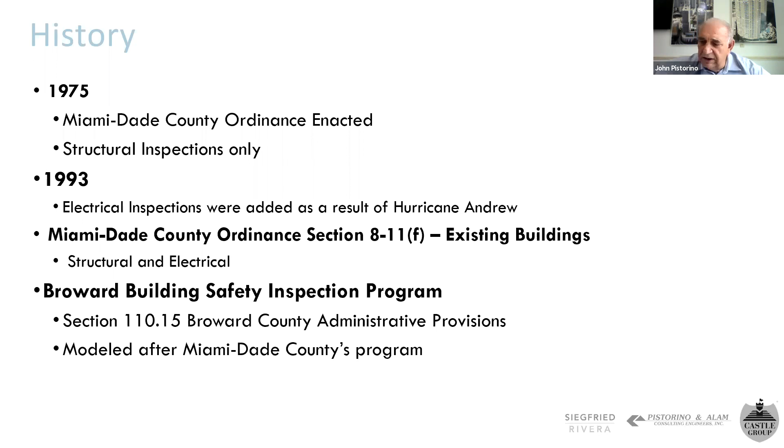The purpose of determining the scope of it has to do with the general structural condition. Engineers who have the ability and understanding of how buildings are designed and constructed can then go ahead and do the inspections in a reasonably safe manner, assuming the buildings have been taken care of.

The 40 years was established because of the issuance of buildings that were around that period of time. The idea was that any new buildings built after 1975, the building owners would still properly maintain them as required. The 40-year recertification was to give the building official a chance to have something on record that it had been complied with all that time.

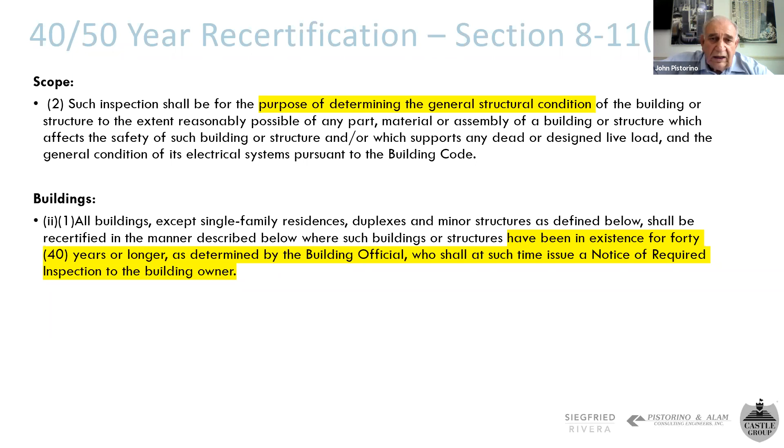As the next slide will show, this is how the report is written. You have to have a person licensed in the state of Florida, a structural engineer or architect who is also licensed and understands buildings. It does include electrical too.

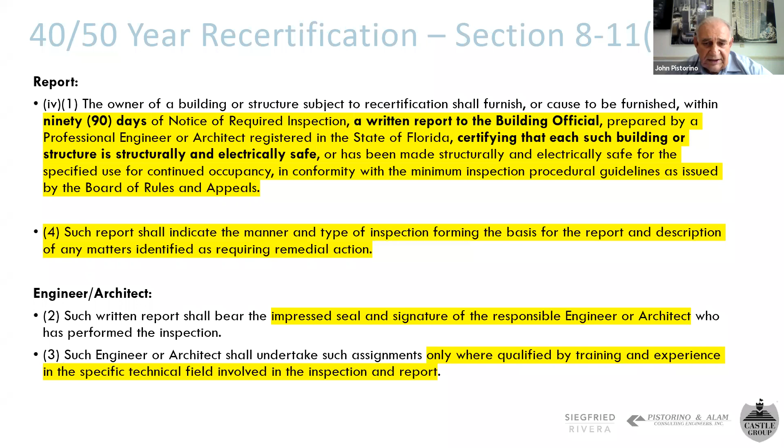So what happens is the building official does receive a report signed and sealed by the architect or engineer stating that the building's condition is as it's intended to be.

The next slide shows what happens if a building is found to be okay and not requiring any work - then the architect or engineer will provide a signed and sealed certificate statement.

If work is required, the building official can give time to do additional repair work, as long as there's nothing impending that would be problematic, with no potential for personal injury or collapse. The building official will be advised throughout the process of doing the necessary repairs.

We know that condominium associations or owners may be going out for bid, which will take some time. If necessary, temporary shoring would be put in place, or whatever is necessary to make sure the building is still safe for occupancy.

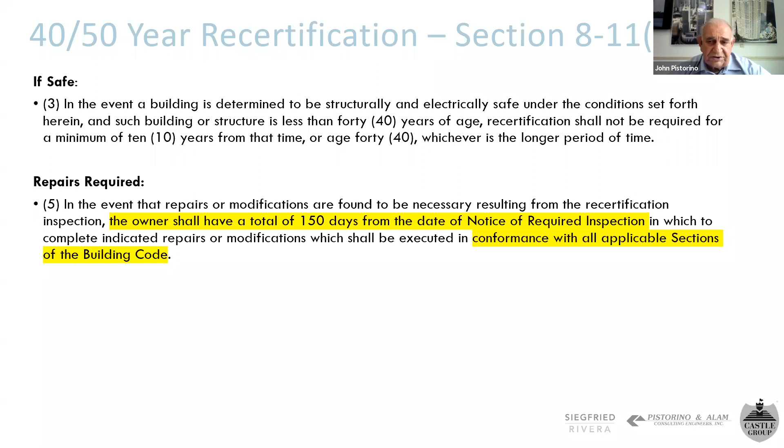The next slide shows an official statement by BORA, the Dade County Board of Rules and Appeals, which oversaw the South Florida Building Code. This is their publication that shows the extent that it is a visual examination.

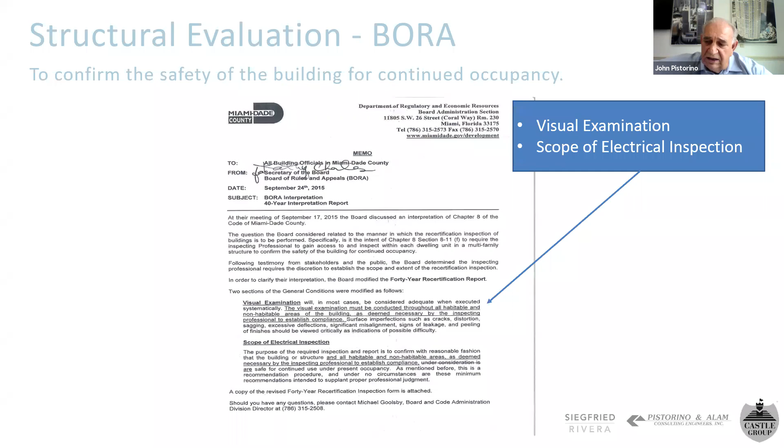On the next slide, you'll also see that included in the inspection concept is the need to realize the effects of time and degradation of the materials the building was originally built with, and to see if any issues have to do with weathering or something that would degrade the materials, which would be taken into account.

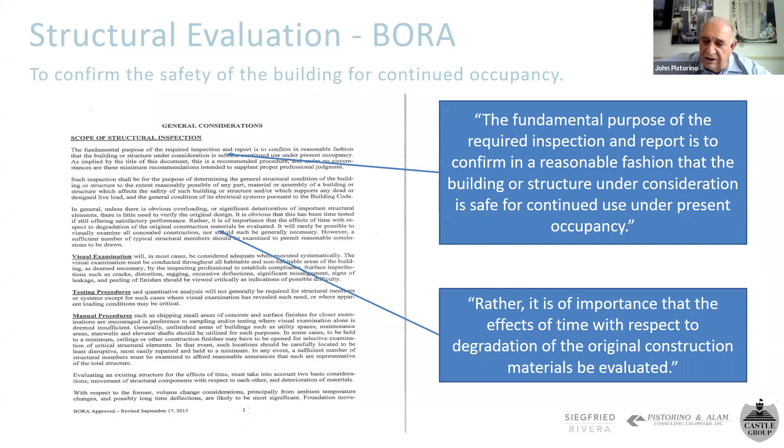So then we go to the next slide - this is where the building official will give a notice to the owners of the building that your 40-year recertification is coming up and you need to comply with it.

We emphasize we don't want to wait for 40 years before we start doing building repairs. What we want is to look after the building from the day it's actually built and first occupied, keeping up with maintenance as intended at the time it was built, so that when you do get a notice like this, it should be fairly easy for a structural engineer to go through the building and see it has been maintained or repaired, so the notice is something that can be easily handled.

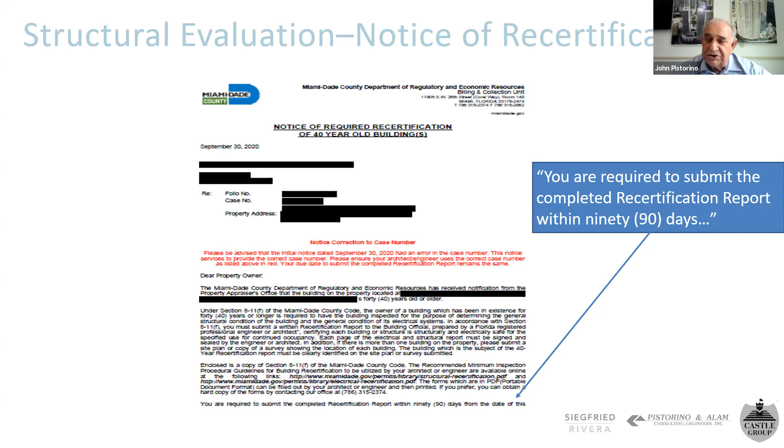So the next slide shows - and I have a comment on this one too, John - all right, this is just a

model notice that a client would receive, and it's really important that as soon as this notice is received by the association, they pay extreme attention to it. You want to be prepared well in advance, but be cognizant that this notice is forthcoming. Also keep in mind that notices get lost in the mail all the time - there are situations where notices have been sent out, the client hasn't received them, and all of a sudden they're behind.

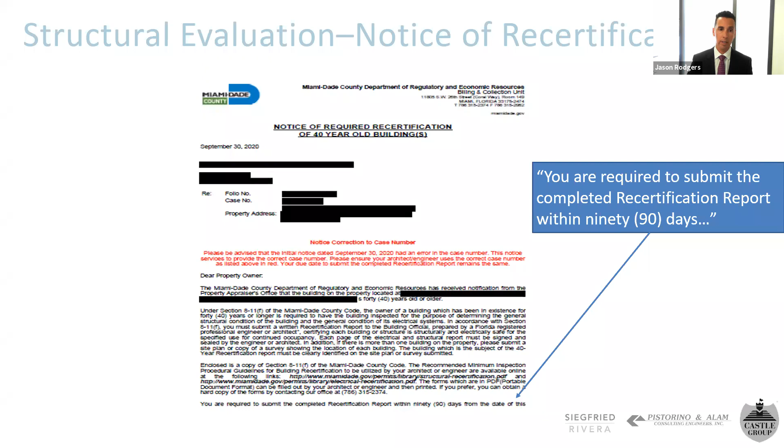This is what happens when you don't comply with the notice. Miami-Dade County will send out a 40-year-old building recertification notice of referral to the unsafe unit.

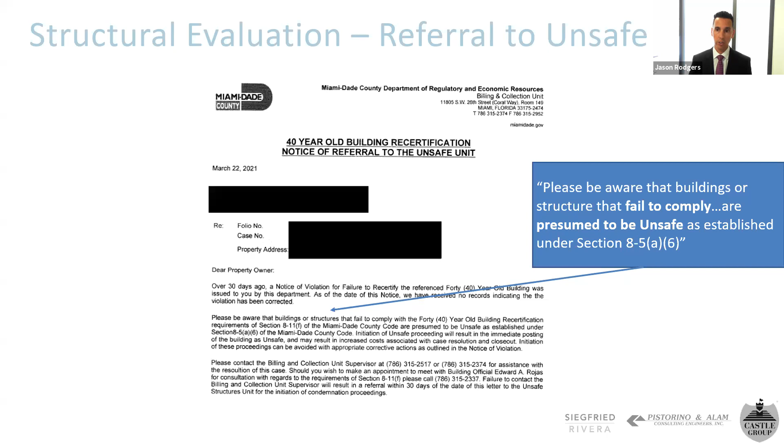If they haven't complied with the recertification program, the county sends out this notice. The building official can then issue a violation, and if it's not complied with within a period of time, the building official has the authority to withdraw the certificate of occupancy and ask the building to be vacated if there's an impending life safety issue. At that point, the building official is engaged, and the association or building owners should actively advise how long it will take to complete the work if found non-compliant.

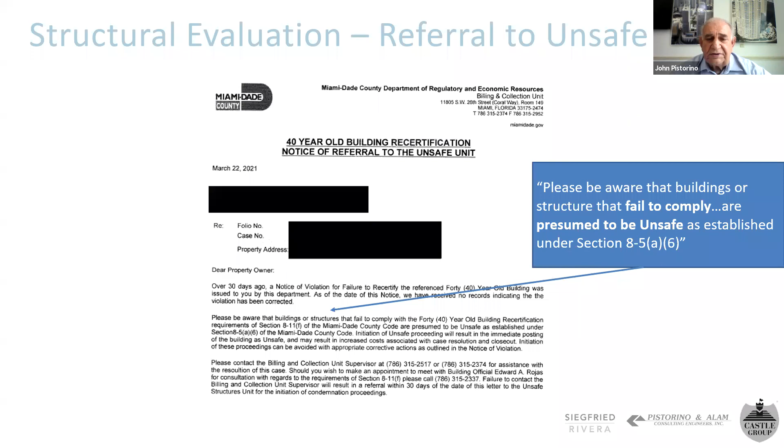The next part covers what we do during an evaluation, concentrating strictly on structural issues, not electrical. We gather all the previous history of the building to properly evaluate its condition, including previous repair permits, structural drawings if available, any violations, and whether the building has been subject to hurricane claims. Once that information is together, we do a visual examination.

A competent structural engineer looks beyond obvious open cracks, which mean the steel has corroded and is cracking the concrete. Steel expands when it starts to rust, and that expansion breaks the concrete.

If there's movement of the structure, perhaps from settlement, the concrete will show a different kind of crack pattern than moment cracks, indicating the building has moved somewhat. These are structural signs of distress related to foundation settlement, known as shear cracks.

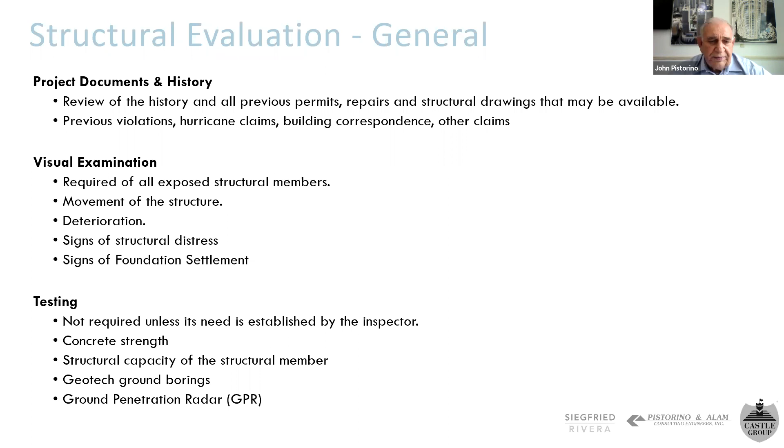Normally, we check that the concrete is solid by tapping it to see if it gives a sharp ting. But if it gives a hollow sound, that may indicate something is going on behind the concrete that requires further evaluation.

The main structure consists of the columns that hold up the building and the floor slabs. There are column capitals over the columns that are part of the slab, just a thickened section of the slab. Some buildings also have beams and girders.

Floors and balconies, especially the balconies, tend to be more problematic because they're exposed to weather and salt water, so we have to examine all the balcony slabs. Up on the roof framing, with heavy equipment like cooling towers, we also have to inspect that area.

In terms of structural distress, we look at cracks in structural members and spalled concrete, which occurs where the steel has become rusted. Sometimes buildings are built without enough concrete cover over the steel. The concrete protects the steel, and in our area, high-rise buildings require 1.5 inches of cover.

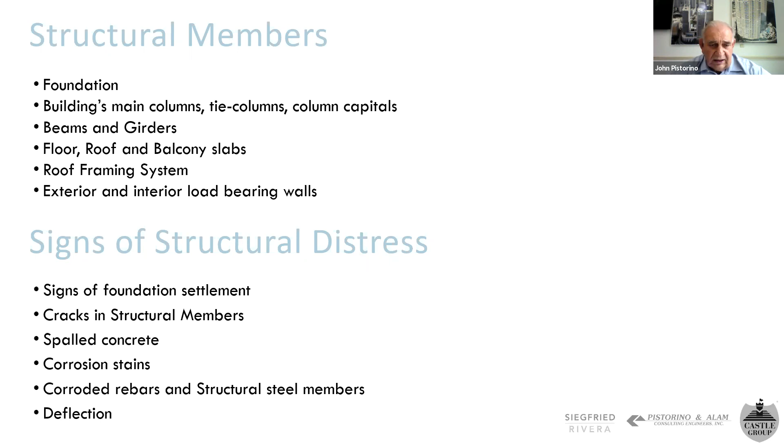The next slide shows that we do have issues with the roof. Most roofs are designed to hold 6 inches of water, that's 30 pounds of roof uplift loads, but we're worried about water ponding on the roof because that can damage the structural slab. We want to make sure the water gets off the roof.

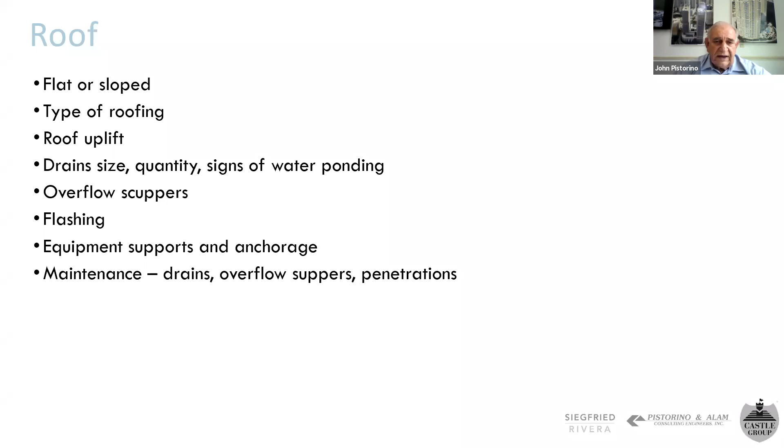We have emergency overflow scuppers to make sure that they're operating, and of course all the equipment on the roof should be anchored down. There's a lot of issues having to do with that. The roofs do have to slope to roof drains that take the water off the roofs, and that's an important part of the inspection.

So go to the next slide. These buildings are designed to be closed structures, that is, closed envelopes. If wind gets into a structure, say from a hurricane standpoint, it can create different loads on a building because of that. So they're designed to be enclosed.

So even though the windows, doors, sliding glass doors and all that aren't holding the building up, they're still considered to be part of the building wall, and they keep the wind and water out so you don't have openings.

So the biggest culprit with sliding glass doors is making sure they're properly anchored to the walls of the building. And of course another culprit is that the sealants and gaskets that keep the water out of the windows and door frames need to be maintained, so it doesn't weaken the fasteners that hold the windows and doors on.

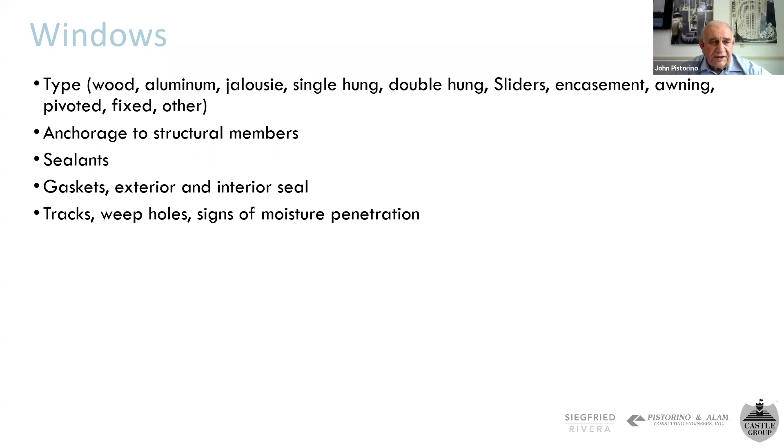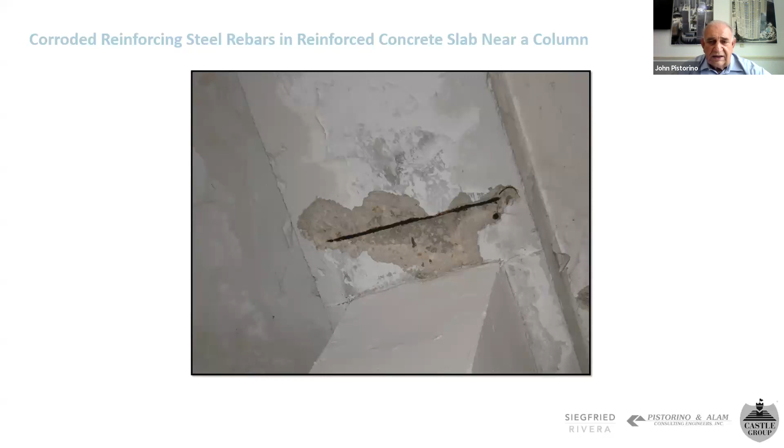The next slide shows this is just evidence, this is corrosion within a column that you would see. So if you're walking around your buildings and you happen to see conditions like this, where the steel for some reason has already begun to corrode, this is what you bring up to your property manager or whoever's in charge.

You start to see things like this, this is an indication. You don't wait, as I say, 40 years for a building to develop something like this. We can see this in buildings that could be 20 years old for that matter.

Next slide please, it shows additional work. And John, I have a question for you: looking at this picture, where is the steel located? Would it be the darkened area in the middle of that column?

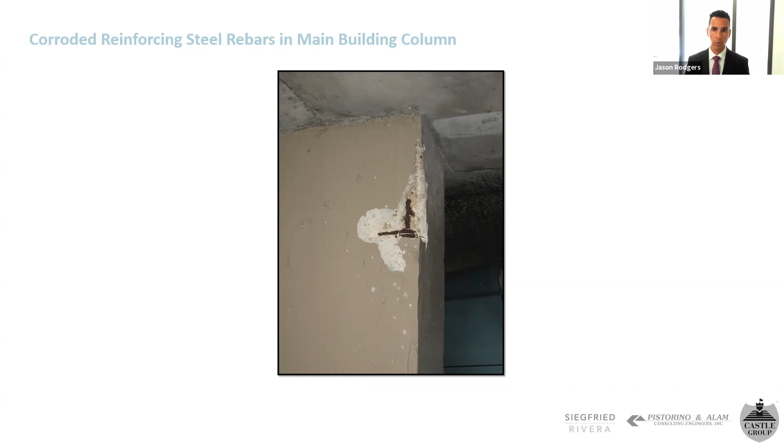Yeah, the column, the vertical steel that goes up and down, that's the column steel that holds the column together. The horizontal steel is like a cage wrapped around that keeps all the other vertical steel together, so that the concrete itself isn't concentrated. The strength of the concrete is inside what we call a steel cage.

So if you look at that vertical piece of steel to your right, and where you have the outside face of the column, that's called the concrete cover, and that's what protects the steel.

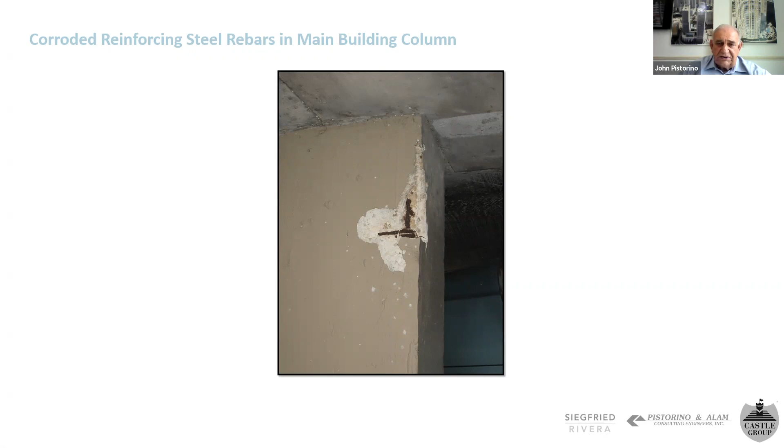Now, why this is going on here, of course, we don't know. If salt got in there during the original construction, then even if you have water protection, the salt inside the concrete can go ahead and start attacking the steel at an early stage.

And of course, we want to make sure there's a particular way, the American Concrete Institute has a particular way of patching or repairing this condition. So all of these conditions, an engineer would identify in a report, making sure that none of it has reduced or threatens the load carrying capacity of the member.

The report would show these kinds of conditions, and the reports would go to the building official and the association or owners of the building.

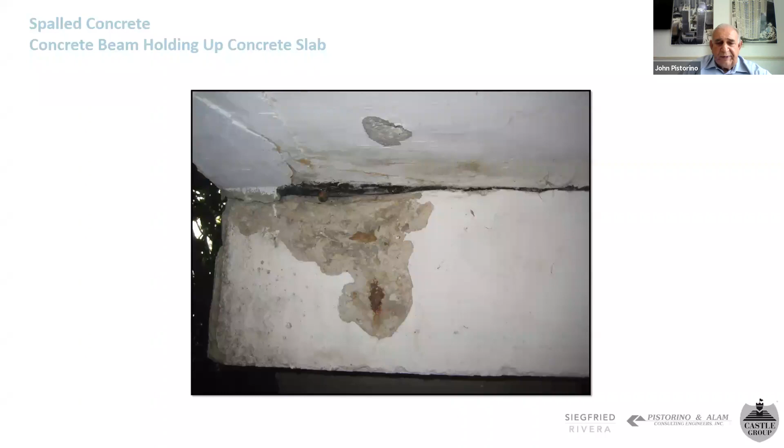Then what it would require is that contract documents be drawn up so that a contractor can come in and properly repair, with very good repairs provisions made so that it's done right. And once the repairs are done, they're permanent repairs. The condition will not continue.

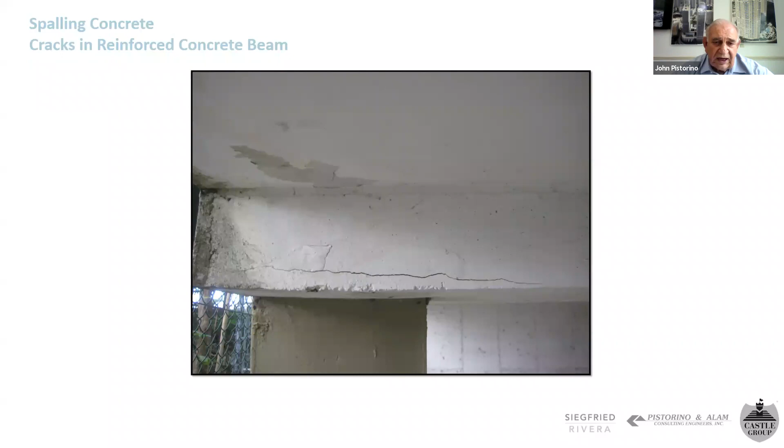This is another example of a beam, this one horizontal steel. The crack in the bottom means that, once again, you can see previous repairs were done. If you look at the left area, repairs have to be done in a particular manner. You have to expose the steel all the way around and make sure it's still sufficient and made rust resistant. Sometimes we have to replace the steel altogether if it's corroded too much.

Next slide, please. Another example of previous repairs that were insufficient. I just have to emphasize that when repairs are done, they're expensive, and they have to be done in a manner that makes them permanent.

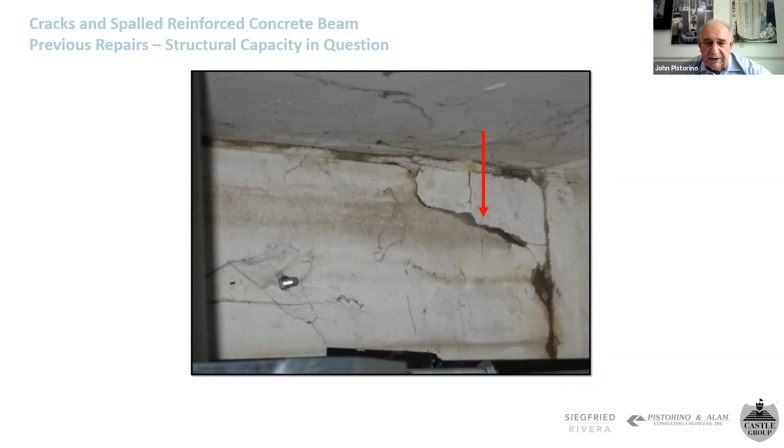At that point, the engineer of record requires these repairs to be reviewed by what we call a threshold building inspector, which is an engineer certified to deal with buildings of this type. Next slide, please.

We won't bore you with slides, but here's an example of water coming through expansion joints from the roof above, and the bottom steel, which is showing it's already corroding, and the concrete is now broken away, removed. The bottom steel is the load carrying part of these beams. These beams will tend to go down, so the bottom steel gives the concrete the strength to keep the beam there, and that's one of the critical areas.

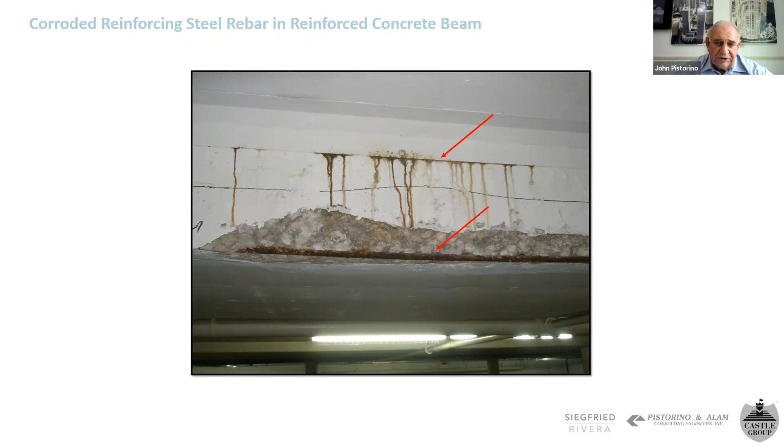Something like this might require temporary shoring, and certainly temporary shoring when it's being repaired. Next slide, please. On the edges of the balconies, which are very...

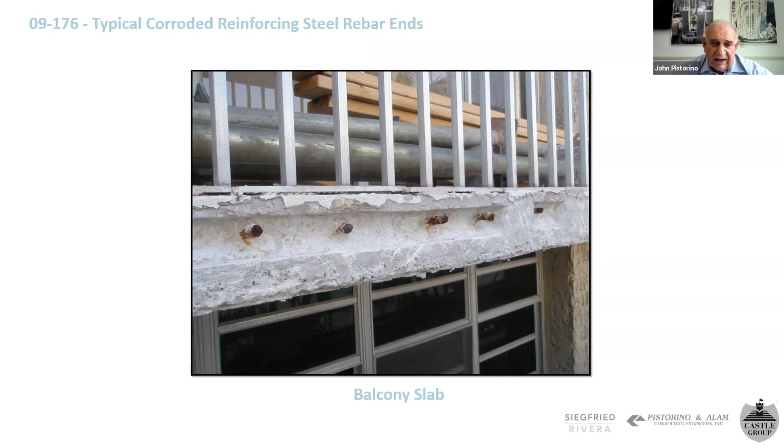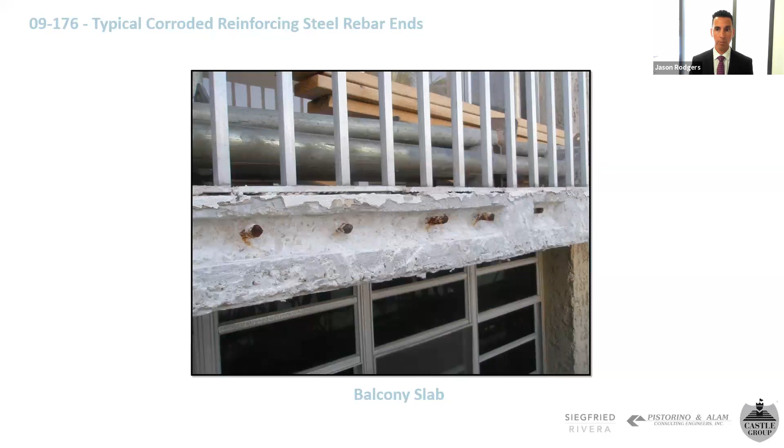So John and I have been involved in projects where we have seen issues with railing post pockets, corrosion in those particular areas, on projects that are less than 3 years old. So it's not just in older buildings, it can be in brand new buildings as well.

Yeah, this is another balcony edge. And we have post-tension cables, which is a newer system, well, more prevalent now since the middle 80s. These areas along the balcony edges are very susceptible to corrosion unless the building is kept waterproofed, because once corrosion starts, these post-tension cables can lose their ability to hold their high tension, maybe 27,000 pounds, 17,000 pounds per cable, and there's a lot of them.

They may be spaced 12, 14 inches apart, but the problem is that these cables all depend upon the anchor, which is right at the face of the balcony. If that anchor gets corroded, the cables will lose their ability to hold, their stress will be reduced, and that's one of the main carrying loads of the building. Another reason why you have to keep the balconies waterproofed, so these cables don't have a chance of getting rusted.

Here you can see this repair is underway. You can see in this picture how shoring has been installed.

Now the building has not been evacuated, but people are not able to use their balconies. The shoring that's put in has to be designed by an engineer. You can see to the right of this picture the shoring in the other balconies, and it normally goes from the very top all the way down to the bottom of the structure so that the balconies themselves are stabilized. Of course the unit owners still remain in their units, but there's no issue of uncontrolled collapse or anything like that.

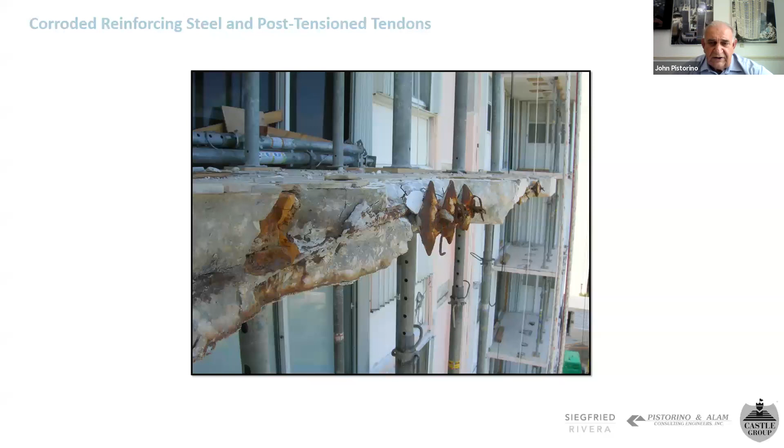Next slide please. So before we move on, Will, I'm sure for a lot of your projects, when significant concrete restoration is going on, you're all sending potential letters to the unit owners, letting them know what's going on, and potentially closing off balconies so that they can't access them.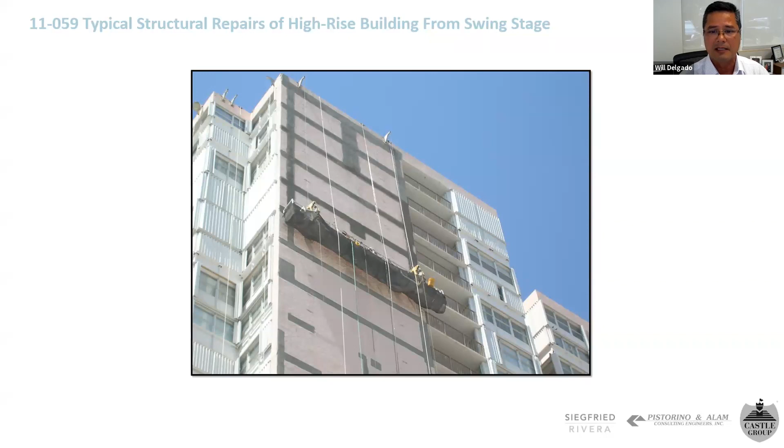But the question is, do you fix it correctly, or do you just fix it for the sake of appearance? I'm pretty sure everyone here would say you fix it correctly, so you have to go the full extent of the damaged area. The board should not be beat up unfairly if a change order comes in because the initial quantity in the estimate wasn't 100% precise.

That's very important. The engineer has to work with the contractor and tell him how far to go in exposing any corrosion in the steel. You might have so many linear feet of steel estimated to fix, but it doesn't make sense not to continue the rest, because if you don't fix it completely, the steel will continue to rust in the area where you stopped.

You haven't fixed it. I don't want to use too many medical terms, but if you don't cut the cancer out, it's going to continue on. You've got to get rid of it altogether.

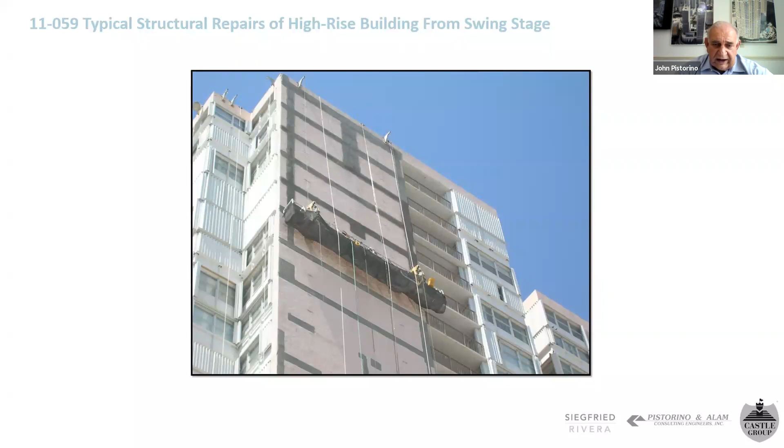From a legal perspective, when I'm drafting contracts, clients will always ask, Jason, I've got a concrete restoration job, I want a lump sum agreement, fixed price to do the whole thing. And I say that's impossible. Put in your allowances, put in a heavy contingency, because say you budgeted $1 million, it could be 1.5 million - we just don't know. And it's important to get the job done.

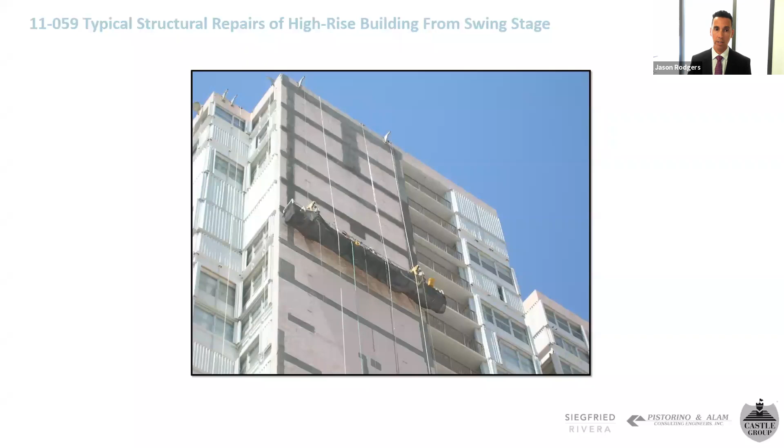Next slide, and I'll continue the presentation from this point.

I want to talk about Chapter 718, Florida Statutes, and briefly touch on it. A lot of clients want to know what their duties are, what their obligations are, and I've picked a few sections just to educate the group.

One is section 718.113, sub 1, maintenance - this is the current version. I clipped a portion that says maintenance of the common elements is the responsibility of the association. Very important - what are we talking about with common elements? Structural components, waterproofing, roof, stucco, paint - all the photographs you looked at previously with John, those are the common elements. It's very important that the association maintain those common elements through maintenance protocols, structural repairs, whatever you want to call it. You have to keep on top of it.

The second section I want to address, and I found this very interesting, is section 718.113.6. This is a repealed version, only in effect between 2008 and 2010. What's interesting, and I don't know why it was repealed, is it addressed the preparation of reports for at least every 5 years. It reads: as to any condominium building greater than 3 stories in height - those are all the high rises in South Florida - at least every 5 years, the board shall have the condominium building inspected to provide a report under seal of an architect or engineer authorized to practice in the state, attesting to required maintenance, useful life, replacement cost of the common elements. That's very important, but this is no longer the case - the statute doesn't exist anymore.

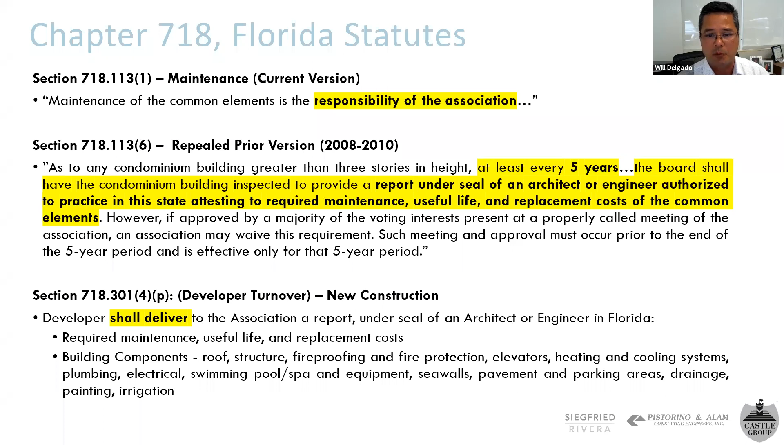It may not seem as important at the time when you're receiving everything, but when it comes time to do some work, those drawings will be critical for the team you hire to do the repair work. That's a constant problem, because sometimes a new board doesn't know what to do with the documents. They have no idea, they put it in a closet somewhere. There are all these construction records that are very important to the project. Eight years down the road, there's a problem with a particular component, and everybody asks, where are the plans? Where are the specifications? Where are all the documents?

Don't rely on the city or the local jurisdiction to house all the documents. There are permitted plans that you'll find within the city documents, and you may find other documents such as applications for permit history, but you're not going to find project records in the city records. That's not their job, they don't house those documents. So what Will says is very important.

I would like to add that the 718, originally in the state statutes, applied to older projects—basically rental buildings that had been converted to condominiums. That was the purpose of it. But then the state changed that and applied it to new construction as well.

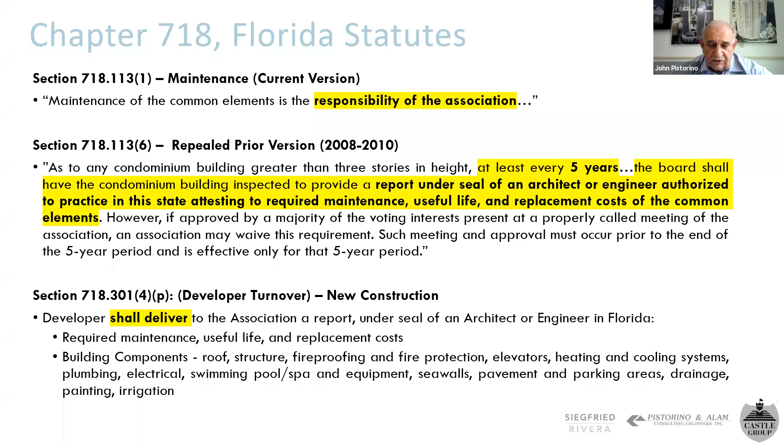So the 718 still requires an independent architect and engineer, different from the contractors or engineers of record, to evaluate the building. Even though the board should have their own independent engineer, the engineer doing this 718 should look at the building critically, and unless they were part of construction quality control going up, they wouldn't know where the defects are. So the 718 should also show any kind of problems that need to be dealt with up front.

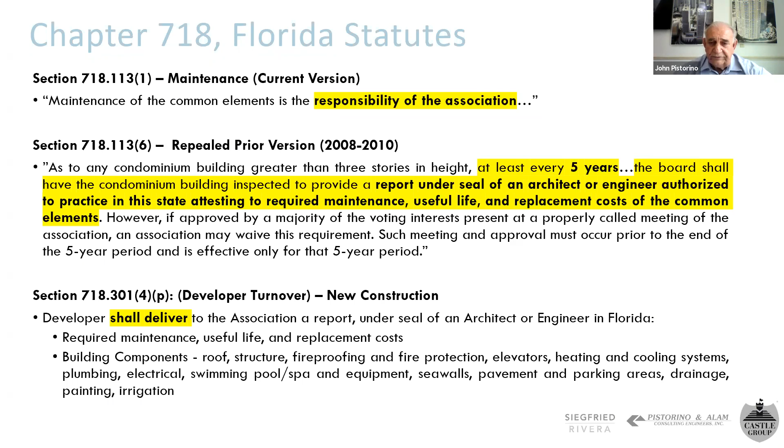So the next portion of our presentation deals with structural repairs and maintenance. We've talked about the 40, 50-year recertification, and for all the attendees, that applies not only to Miami-Dade County but also to Broward. So when John was speaking about the 40, 50 year, he was also referring to the Broward code, as it's modeled after the Miami-Dade codes.

So the way that we break down the construction phase: you have a problem, you have issues that need to be addressed, and we have two different categories. One is the 40, 50-year structural repairs that you have to comply with under Miami-Dade and Broward codes. The second section would be under the association's obligations to maintain the property, meaning they have to comply with Chapter 718 and perform their repairs and maintenance.

John mentioned this earlier, Will mentioned this earlier: do not wait for the 40, 50-year recertification requirements. Don't wait for it. You have to perform routine repairs to building components such as roof, stucco, paint, concrete, steel, post-tension cables, balconies and railings, waterproofing and caulking, and the list of building components here on this sheet. John, can you elaborate for us on that—something you like to see done?

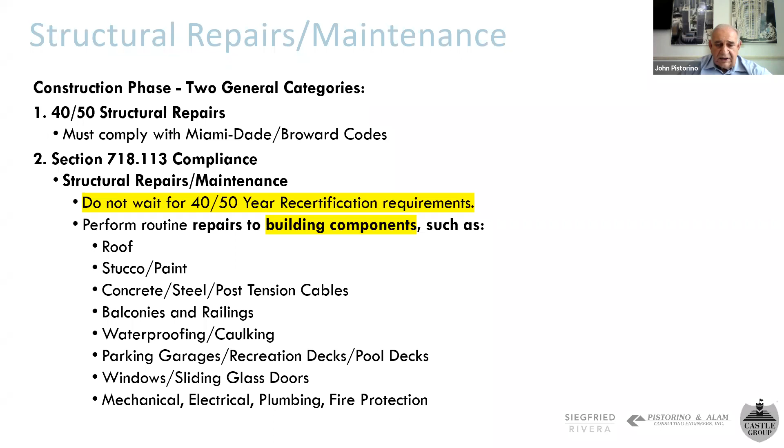I want to add one thing here. We will all find buildings with original design and construction issues, and we need to address those. There are a lot of buildings out there that were not properly designed, not properly constructed. It's not simply a matter of maintaining it, it's a matter of repairing those items and making them work as they're supposed to work. So there is a distinction between structural repairs and repairs to address those construction defects.

And then there's the maintenance obligations as well, so you have both of those that have to be viewed. So for example, if you have a construction deficiency that needs to be corrected, correct it. That's important. Just don't keep the same construction deficiency in existence - address it, move on, maintain it.

Jason, along those lines, I just want to remind everyone here, we live in a hurricane zone, and your building may only be 10 years old, and you don't have your 40-year recertification on your mind for some time, and a hurricane has passed by. I've had associations say that they didn't bother to have an inspection done after a direct impact from a hurricane. And John would tell you that a hurricane puts unusual stress on a building, and where something was perfectly fine before, you'll find that there may be substantial cracking and things are out of alignment right after the passing of a major storm. Good points.

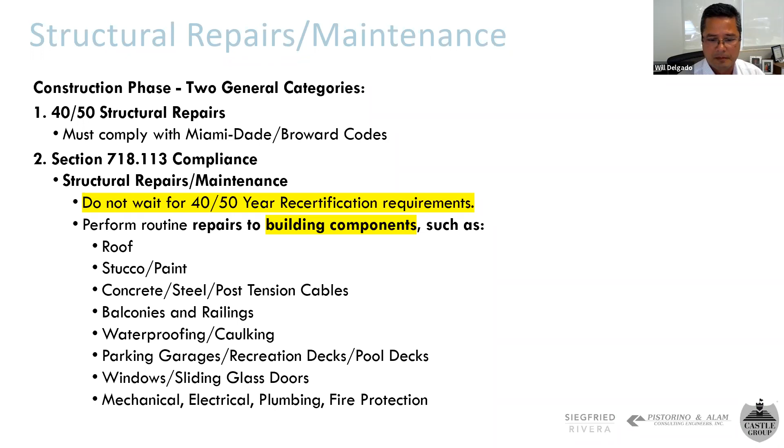So at this point, you have to make repairs to the building, you have to maintain the building. And so what I've seen when I get involved in projects later on is I see there's not enough critical analysis by the association and its team. I sometimes find that there are a lack of qualified and experienced people for the job. And ultimately, I also see that sometimes wrong people or entities are selected for the job.

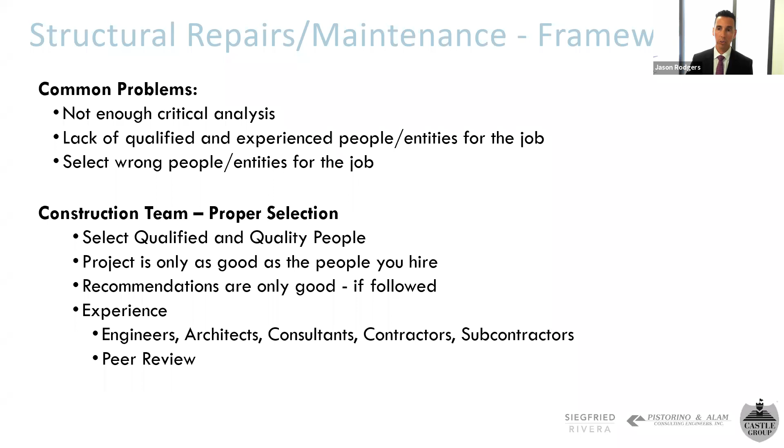What's important here is that when you're doing these projects, have a solid construction team. You need to select qualified and quality people. Your project is only going to be as good as the people you hire. Recommendations are only as good if you follow them. And also look for experience. John mentioned that earlier - it's experience and qualification.

So starting with the design side, because that's important. I've seen clients just hire a stucco subcontractor or hire a concrete contractor without a design professional involved. And that entity goes out, makes repairs, and those repairs aren't properly performed. So hire the right people.

Design professionals are architects, they're landscape architects, they're engineers, they're structural engineers, civil engineers, mechanical, electrical, plumbing engineers, and they should be licensed. Are they a licensed professional engineer in the state of Florida? Are they a certified threshold inspector? Are they a licensed registered architect?

Other questions that one should ask them is, do they sign and seal drawings? Have they done it before for other projects? Have they functioned as an engineer of record, meaning that engineer responsible for the job? Have they done similar work, similar projects? Ask for the project list.

John mentioned earlier about the American Concrete Institute. Ask these design professionals, what organizations are you part of? The ACI, the Post-Tensioning Institute, the Portland Cement Association. Are you a certified Florida threshold building inspector? So ask those questions - I find that there's not enough critical analysis of questions.

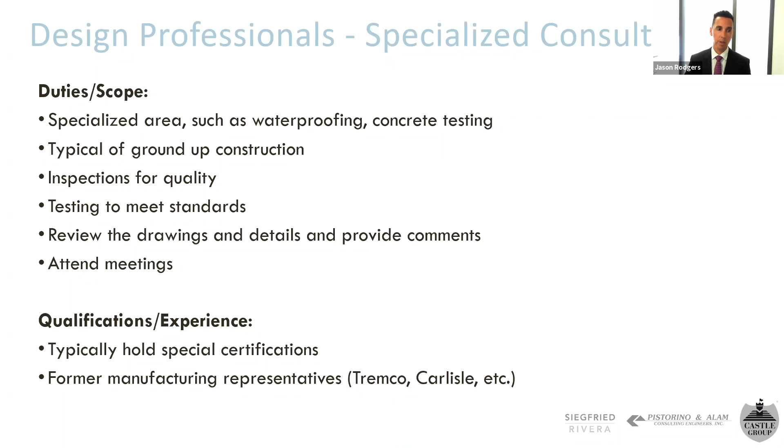Design professionals prepare bid packages and plans, which is very important. No contractor should be bidding on a job without plans and specifications. If they're bidding on a major job, especially concrete restoration or structural work, without plans and specifications, it's not going to go well. So the design professional prepares those bid packages, sends them out to qualified vendors or contractors to bid. They'll have a bid meeting, everyone meets on site, reviews and inspects the condition, walks the property, and additional testing may be performed to identify the conditions on the project.

Contractors, very important. Are they qualified? Have they done this work before? Contractors have a non-delegable duty under the law. Will they be responsible for subcontractors? Do they plan on using subcontractors? Who is the qualifier for that job? Who is the superintendent? Who is the foreman?

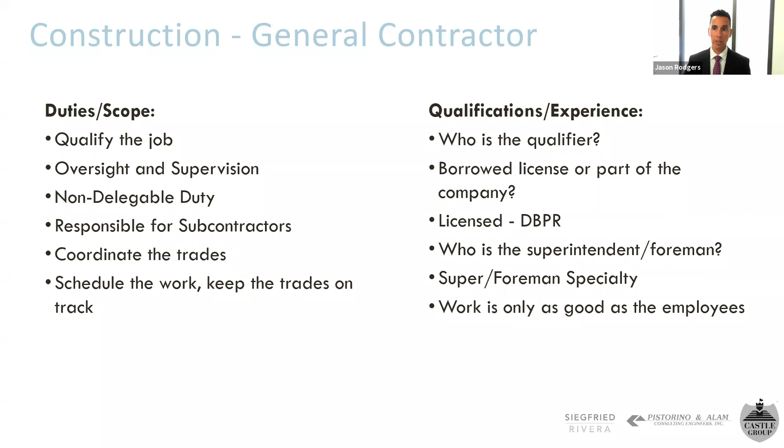Construction work, and any work, is only as good as the person overseeing it or the person doing it. So it's very important that you select a qualified general contractor with a lot of experience in this area, and that you meet the foreman or superintendent overseeing the job on a daily basis.

Another question: will the general contractor use subcontractors, or are they going to self-perform? If they're going to use subcontractors, check the qualifications of those subcontractors, because if a subcontractor isn't qualified to do the work, what's the point of bringing in that group at all?

Another important thing: insurance on the project. Make sure they have enough insurance - we don't have time to cover what's enough, since every project is different. And then bonding capacity: can they obtain a performance and payment bond? That's very important, and you need to know for what amount and for what time period.

Manufacturers are very important. They provide technical services and come out to the project. They're also responsible for delivering what's called a notice of acceptance. The notice of acceptance was actually devised in Dade County back in the 90s. If a contractor or manufacturer wants to use a prefabricated product in Dade County, say a window or door, they have to go through a series of tests and prove that the windows and doors meet building code requirements for wind and other elements.

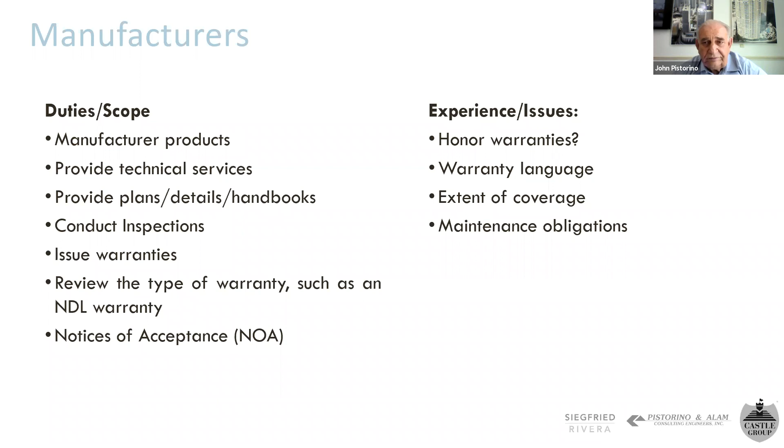Legal, I'll touch on that just briefly. You want qualified engineers, qualified contractors, subcontractors, and qualified lawyers that specialize in the area to assist in protecting the association.

Don't sign a contractor or subcontractor's contract. Get association counsel involved, sign the association's contract or work off the association's contract. That's very important. I get involved in problem projects where clients, not my clients but other people's clients, will call me in to evaluate construction projects and see what's wrong. Sometimes I find the client just signed a proposal the contractor put in front of them, with no protection for the association, no insurance requirements, no bonding requirements. It's just a disaster.

So please pay attention to your entire team. The construction team is very important for construction projects, and it also includes property management. I'll turn this over to Will.

Yeah, thank you, Jason. I've literally dealt with this very question hundreds of times in talking with our boards. Jokingly, I say to them, the next time you have a toothache, how about we call in the painter? Right, it's in the context of, guys, we have to align skill sets with the problems.

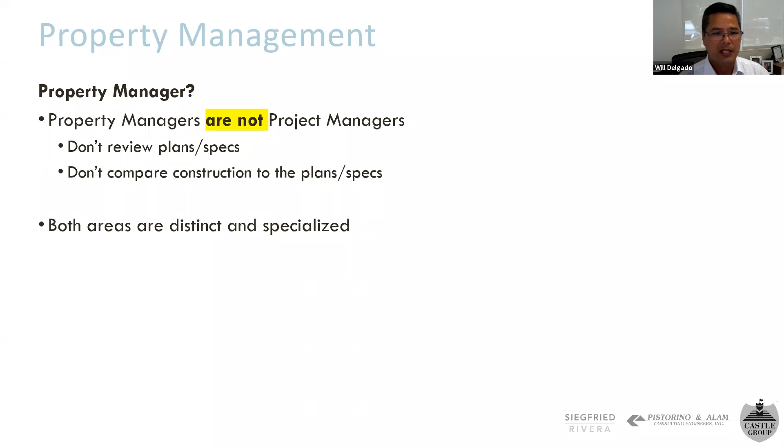So to the point here, your property manager is not your project manager. You're going to hire these experts and use them accordingly. The best role for your property manager is coordinating the team - getting everyone together for progress meetings, the communication plan with residents and the board, and helping process payments. The property management team is there to hopefully make the project go smoothly by keeping everybody aligned with the schedule, and when things change, keeping them aware of the changes.

But out of the entire team of hundreds of managers that my company employs, I literally have one individual who has an architecture background. None others are engineers, none are former general contractors. So recognize, as has been mentioned many times, know what you're hiring.

Your property manager is there to do the administration of your building. The maintenance team that's part of your property management team is there to do the basic maintenance. When you get into a 40, 50-year recertification, we're talking about highly skilled individuals like John who are going to come on board to lead you through.

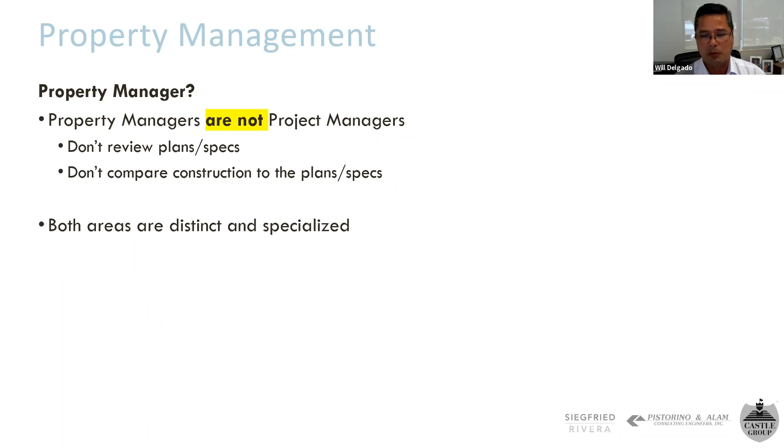So, association challenges - I'll let Will tell us about some of the challenges his group has been confronted with over many years that are common across the board.

Yeah, I would start off with a quick quote from Benjamin Franklin, that an ounce of prevention is worth a pound of cure. That's a theme here - how do we go about this, how do you do it where it's not such a detrimental financial blow to the association?

So let's talk about planning in terms of short and long term. On the short term front, it's really about your association budget, in particular two areas. One, the repair and maintenance section, where frequently the board will look to make cuts, thinking perhaps we can pull back on this item. I would tell you that's a short-term gain and a long-term strategic flaw, because not addressing these items as they present themselves, as John previously spoke about, only leads to those problems growing in severity. It is exponentially cheaper to deal with problems as they arise rather than allowing them to go for years and turn into major repairs.

The second part of that is people. Again, we've spoken about how you're as good as what you hire. I recently had a board president ask me for a maintenance chief who had an electrician's license.